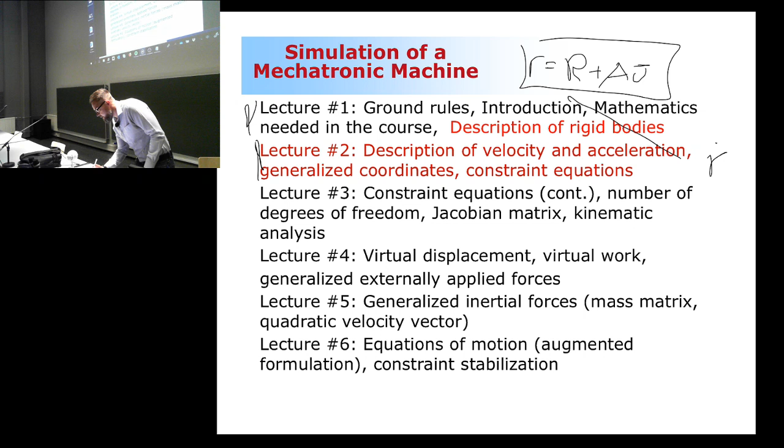And once we differentiate the velocity with respect to time, we will get what? Acceleration. So we will get acceleration. Why are we interested in acceleration?

Because that will be something we definitely need later when we look at dynamics. Remember, in dynamics we basically deal with this equation you're very much familiar with: externally applied force is equal to inertial forces. This is mass multiplied by what? Acceleration. So instead of using A here, we will use R dot dot. That's it. That's how we can describe particle dynamics.

But there's something important prior to that: we have to look at how we can limit the motion possibilities of a multi-body system. Remember, a multi-body system consists of multiple bodies connected together via joints. What's the role of joints? They limit the motion possibilities.

How can we express these limitations, these couplings between the bodies? We go back to this equation, and again we will use it over and over to describe the constraints, the joints. That's the story.

Now, just one more notation before we move ahead. I might ask in my in-class quizzes something like how is this and that, and one of the options is related to forces and moments.

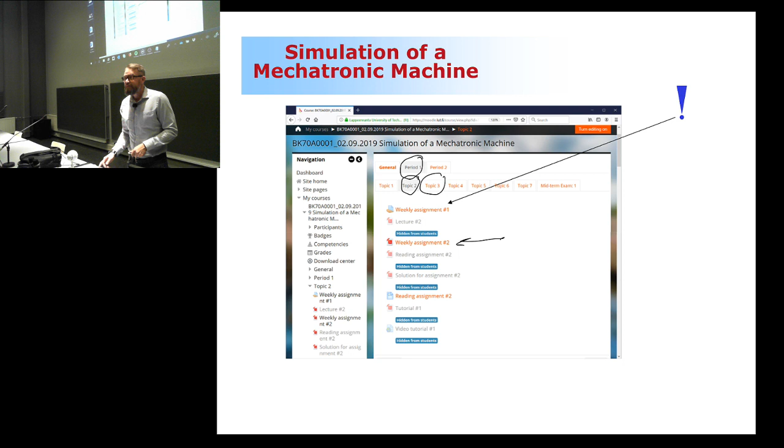Yes, we're all doing this. Just one more setting. YouTube officer, are we good with the voice? Is the voice all right?

It was really annoying to follow last week's lecture. You can easily develop a serious headache following that, not just because of the subject matter, but because of the breaking voice. I was checking all the equipment, and the only explanation for the breaking voice was a low battery in one of these devices. How is my voice today?

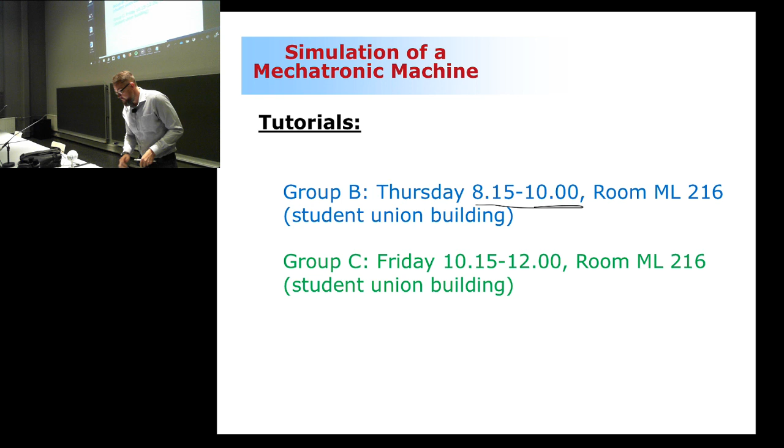What we discussed last week was multi-body dynamics. We concluded that multi-body dynamics is for a multi-body system, a system that consists of multiple bodies. It could be roughly one system like a pendulum, which is just a single body, but you can still analyze it using multi-body system dynamics. Or you could have a double pendulum, where there's one body and a second body.

What happened? The air server is off. Oh, please. Too many things, I need to connect this again. Okay, connect it again. So we are back on. Just need to remove this one. Can I use this one? No, where is it? Not connected.

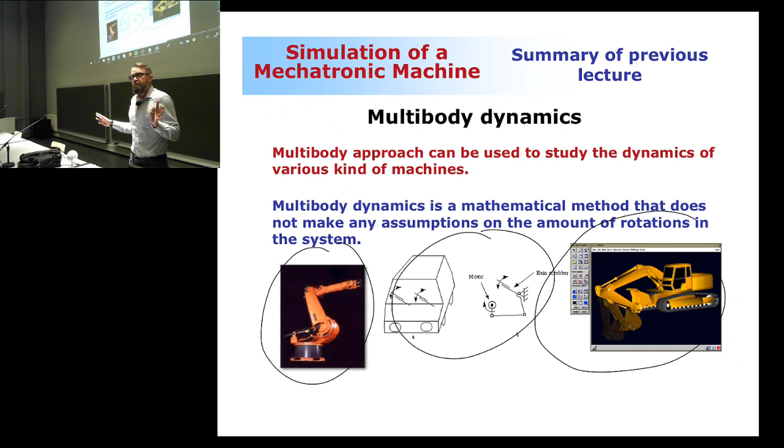We also learned that if a multi-body system consists of multiple bodies, one body consists of an infinite number of particles. It's very important to understand that a particle is very small—it's a mathematical notion, not something you can find in real life, but a very small dot. Because it's a very small dot, it does not have rotational degrees of freedom. Remember, a particle does not have rotational degrees of freedom.

In an in-class quiz that is coming soon, one option is related to particle rotation. Particle rotation makes no sense, so don't select that option. Whatever you do, please don't select that—it makes me feel happy if you don't.

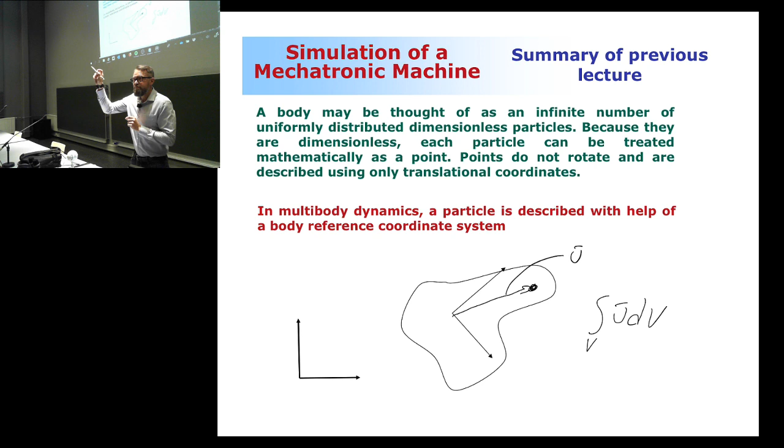So these particles—there's an infinite number of them—are described with respect to the body reference coordinate system. This concept takes a little while to understand: once we're describing one particle, the vector u bar is constant for it. But at the same time, vector u bar is scanning every single particle in the system. How is that possible? It's possible when I'm integrating the vector u bar over the boundaries, over the volume of the body, and this accounts for all the particles within the boundaries of the body. But for a single particle, that's a constant value.

So how does it scan? Well, it depends on where the body reference coordinate system is located. Say I have a box-like body. If the coordinate system is located in the lower corner, the vector u bar scans from 0 to W in the longitudinal direction, and from 0 to H in this direction—every single location within these boundaries. If the body reference coordinate system is located in the middle of the box-like body, then it scans from minus W divided by 2 to W divided by 2, and in the same way from minus H divided by 2 to H divided by 2.

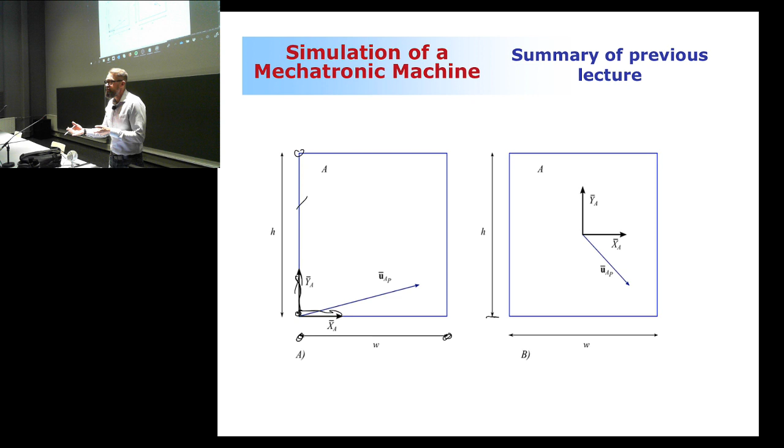Makes sense, clear. All right, this is the last thing about the summary, and then we're going to move on. As I mentioned, description of one single particle consists of two components. First is a translational component, accounting for the translation of the body reference coordinate system. Then I have the rotation matrix, which accounts for the orientation of the body reference coordinate system.

Now what is this matrix doing for us? It is mapping two coordinate systems together. What are those coordinate systems? The body reference coordinate system and the global coordinate system. That's what it's doing—it's mapping.

And it can be used for two purposes. It can map from the body reference coordinate system to global, or the other way around. How does that happen the other way around? Simply by taking the inverse of the rotation matrix. It's an orthogonal matrix—remember what an orthogonal matrix is? That's a special matrix where the inverse can simply be expressed as the transpose. The transpose is the mapping direction.

Now, if you look at the columns of the rotation matrix, these columns are actually defined in the body reference coordinate system axes—this is the x-axis and this is the y-axis. They are unit length, as a coordinate system is supposed to be, and they are perpendicular with respect to each other. So if you look at these two axes, they have a 90 degree angle between them.

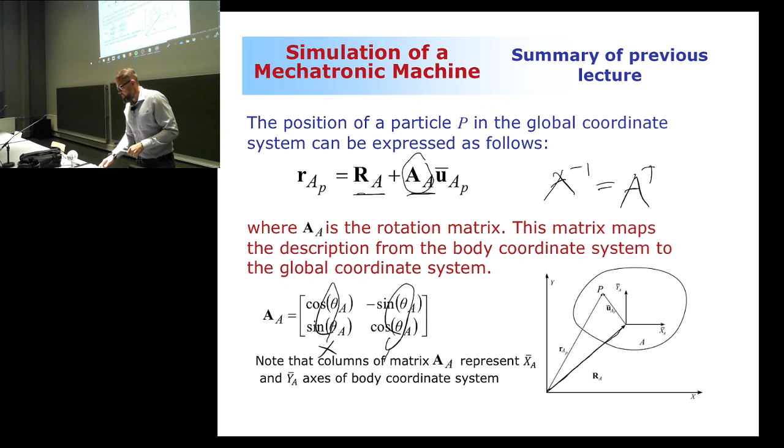Clear? All right, so let me ask you this: what's the role of the rotation matrix? This is our first in-class quiz, so please go ahead and log into Socrative. I can see that we already have 47 students logged in.

I'm thinking big today—I'm thinking the success rate is going to be more than 70%. Correct, more than 70. We'll see, maybe it's going to go all the way up to 90%. 100%, that would be really something, really really something. Then you're going to have a big group hug. Okay, now someone will make a mistake intentionally knowing there's this group hug. So, no group hug—let's put it this way. All right.

Think about it. If you're not sure, go ahead and consult your fellow student, because I would like you to score high. We'll go off here and I will revisit this part very soon.

Now what I'd like to do is spend 10 minutes on a topic that's a little bit aside from the mainstream of today's lecture and of this course—it's related to three-dimensional spatial description. This will be short, but I'd like you to be aware of it, and to know what happens in a real case, which is typically described in three-dimensional space. What's the difference between two-dimensional and three-dimensional space? Well, obviously we have one additional coordinate axis—a third coordinate axis—and that changes the game significantly.

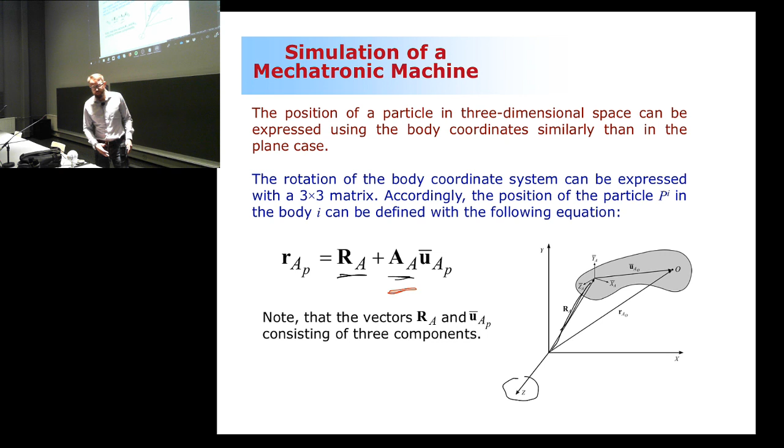Good. So how is it that we can describe these rotations in three-dimensional space? We're going to take a look at one method that is very famous, based on Euler angles.

Euler angles is a method based on three successive rotations. Successive rotations - successive, do you know what that means in English? This is the only time I'm doing translation for Finnish students. Successive means 'peräkkäiset' here.

What are the other nationalities we have here? Let's see, Russians - do we have Team Russia here? We do. Okay, so what's successive in Russian? I don't know. You need to look at the translation for successive rotation, because if you don't understand that word, you don't understand the concept. Team France, what's that in France? Successive rotations - same, I think. Is it more or less the same? Okay, so you know what it means.

So it's like once rotated will be rotated again, and two times rotated will be rotated a third time. That's what successive rotation means. All right, let's take a look at the concept. It's again based on successive rotations. How can we do the rotation? Well, there are of course many ways to do it.

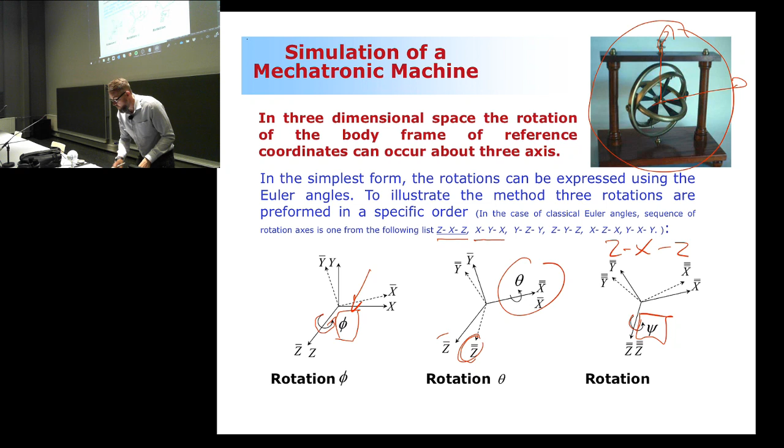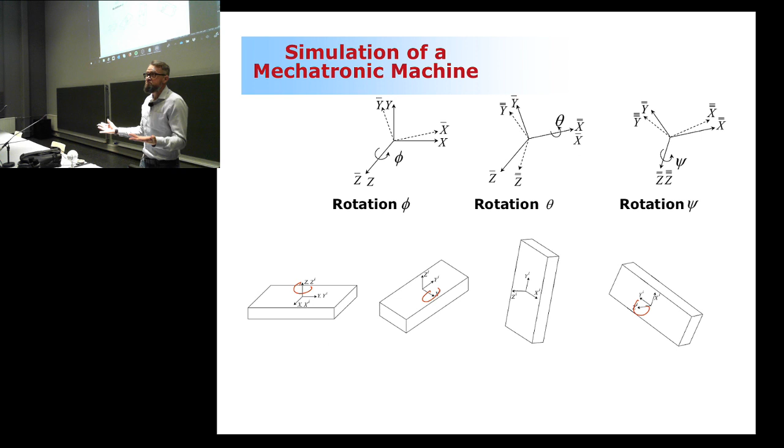All right, clear, so that's the story. So these are the three rotations. How it goes: first, rotation around the z-axis, like it rotates like this. Then around the x-axis, it goes like this, and then again around the z-axis. That's how it goes.

What that means mathematically is that we get back to this coordinate system, and each one of these rotations can be described by a 3 by 3 rotation matrix. Successive rotations mathematically can be accounted for by multiplying these matrices together. That's it. Let's look at the first rotation.

Remember, the first rotation takes place around the z-axis. In my 3 by 3 rotation matrix, the final column tells me where the rotation takes place - that's the z-axis. And if you look at this submatrix, that's exactly the same as what we dealt with in the two-dimensional case. So there's a lot of similarities.

Second rotation takes place around the x-axis - look at this, it's here. How the rest looks - again, it looks all the same. The difference, of course, is that we have theta here, and this one here is psi, and that notation is here. And then again, the final rotation is around the z-axis. So it's very simple, that's it.

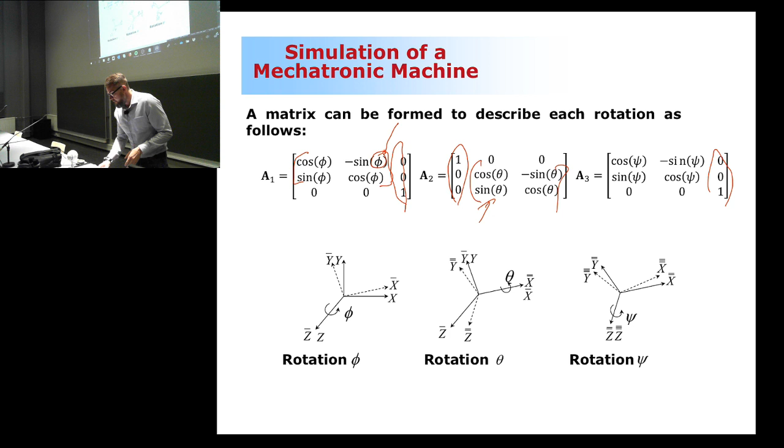So now we can just go ahead and multiply these together, and this is it - this is how the 3 by 3 rotation matrix looks. That's the rotation matrix for you to solve this week, one of this week's weekly assignments.

The problem related to this week's weekly assignment is that I'm asking you to introduce the rotation around the y-axis. But we don't have a y-axis. How is it that you can make it happen? You can make it happen by first introducing a rotation in order to move the x-axis to the original location of the y-axis.

So that's 90 degrees. Then you do your rotation, and then you compensate your first rotation. That was just because you wanted to have one axis in the direction of the original y-axis. So you take the final rotation as minus 90 degrees, pi divided by 2. That's it, so that's the solution.

You got it? You didn't, but that's all right because there's a recording, so you can go back and forth. And then you do the weekly homework and it will be fine. I will repeat this next Monday - let me think, because the deadline is not this Sunday, but the Sunday after that. Yes, so I will repeat it. All right, you good?

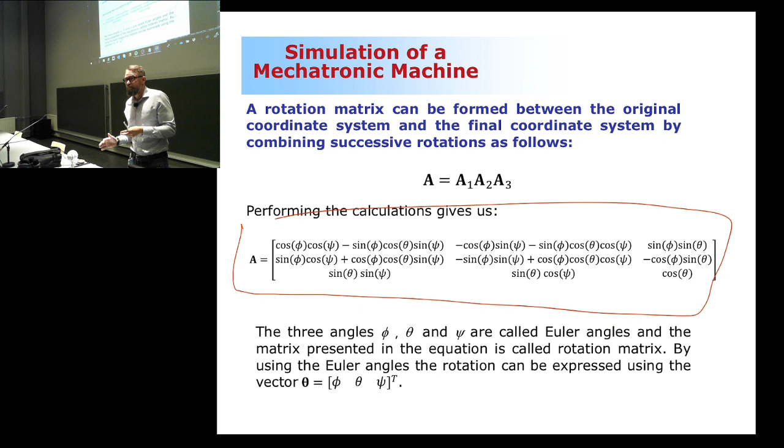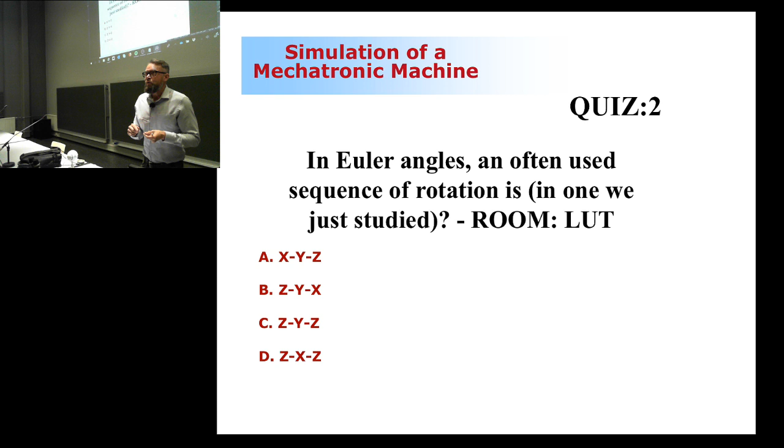Euler angles - the often-used sequence of rotation is the one we just studied. What was the sequence of rotation? So these are the options. Just a second, I need to go and look at how we're doing. Okay, what are the cases regarding the success rate?

So I'm saying 91, 91. What is it you say? 82, 82. I think, yeah, maybe you're right about that.

So what was the sequence of rotation we just looked at? All right.

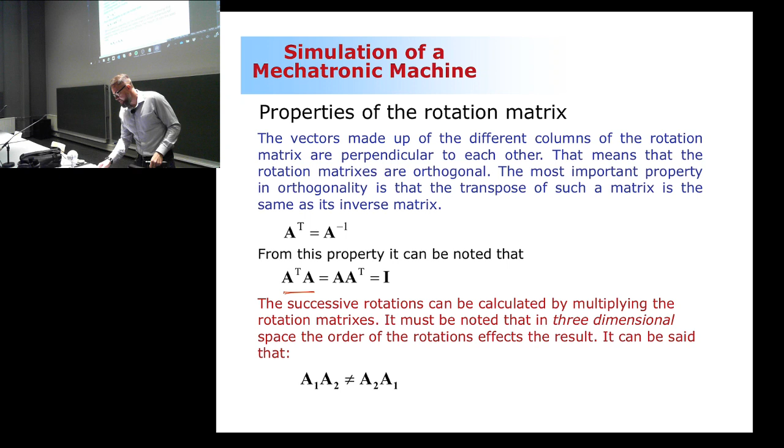And with that, I'm going to move on, and I'm going to look at the velocity and acceleration. What really follows is painful mathematics. That's what's going to follow. So before stepping into this painful mathematics, you need to take a deep breath, like, one more time.

Okay, now don't get confused about mathematics. Please don't, because we have a bigger dream in mind, not just doing this parcel, that, because that makes no sense. But we have this big dream. And the big dream is that we wanted to define the acceleration because, remember, F equals mass multiplied by acceleration. We need that to describe the equation of motion.

So that's the reason we're going into this painful mathematics. It is what it is, but sometimes you need to make sacrifices in your life. This is one of those times. Okay, so how it goes: we take the description of the particle, and we're going to differentiate that with respect to time. Simple like that. Okay, let's make it happen now.

All right, so here it is. I'm going to take a partial differentiation of this position of a particle with respect to time. You know how it goes, I can do this component by component. So I can first differentiate this translational component with respect to time. What is it that I'm going to get as a result? I'm going to get r dot.

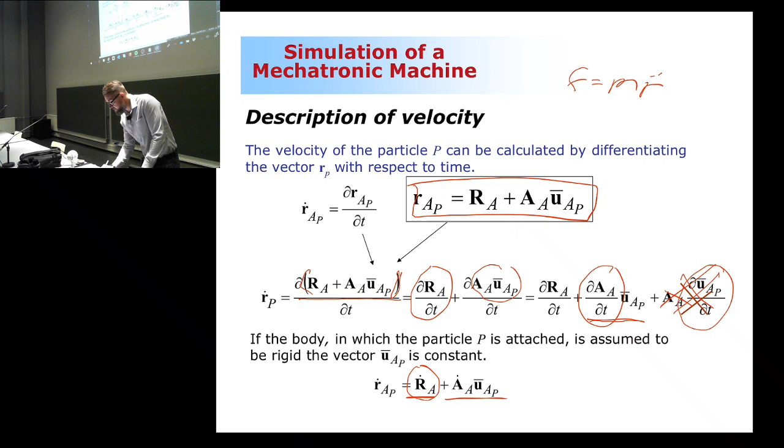That's constant, so it's not changing as a function of time because it's a constant. So I can say, okay, forget about this component in total. So what is left is two components: the translational velocity and the rotation matrix that is differentiated with respect to time. This is where we need to take a close look at what this A dot actually refers to. And this is where we need to take the toolbox from the mathematics into use.

So we have to apply this partial operation to each one of these components: cosine theta, minus sine theta, sine theta, and cosine theta. Each one of them has to be differentiated separately.

Following the chain rule of differentiation, this is just mathematics, nothing else. You can get this such that when you differentiate cosine with respect to time, you get minus sine theta, and then you have angle theta differentiated with respect to time. When you differentiate minus sine theta, you get minus cosine theta, and again partial differentiation of theta with respect to time.

All right, you still with me? You want to have a break? I know. You know where the door is located? It's over there, I can help you. I can walk with you, I can hold your hands and we can walk together outside of this lecture room. Oh, there's another door here too, so maybe we can use this one.

So don't get confused about mathematics, please, because this is just a tool. Soon we're gonna get something that is meaningful. We're gonna take a look at the interpretation. What is it we're gonna get?

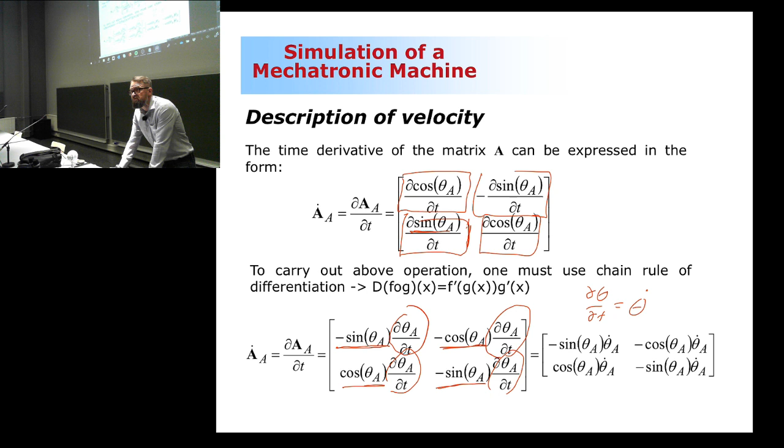All right, so I was here. Then you differentiate sine with respect to time, so you get cosine, and again you have this angle theta with respect to time. Here's a minus sine, and then angle theta. Let's denote partial theta, partial time as theta dot. All right, so let's do it. This is what we're gonna get, and now we're very close to the end.

Now, A dot, this rotation matrix dot, can be expressed such that I have here the differentiated rotation matrix. This has a relation to the original rotation matrix: it is just rotated 90 degrees, nothing else. It's rotated 90 degrees, and then I have here angular velocity. Rotated 90 degrees multiplied by angular velocity.

End of the story. All right, so in summary, velocity can be expressed such that velocity of a particle consists of two components: translational velocity, and then rotation matrix rotated 90 degrees multiplied by angular velocity. To denote this, this is a rotation matrix, and the subindex here is theta. So that's what it means, and that's exactly how it looks.

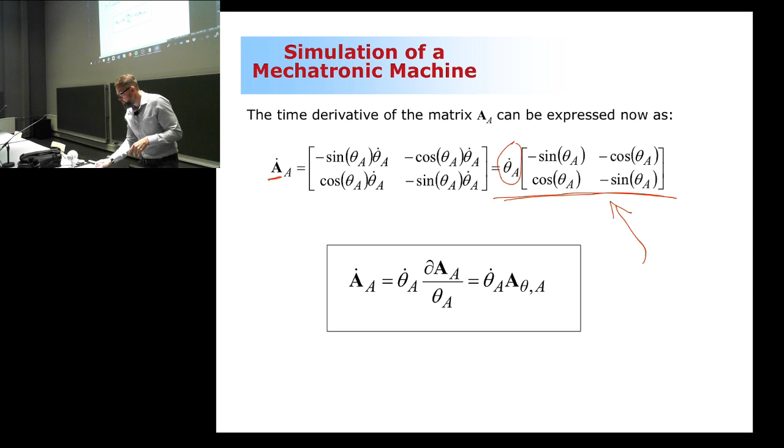And then I have here the U bar, which has to be there because I'm looking at the velocity of one single particle. Makes sense?

Are you still doing like, yes, I have this can-do attitude, I can make this happen, this will happen? You have it? Good. Can you take another load? This is going to be more painful, I can guarantee you that, because there is still one more step — this was just the middle step. And the dream is over there, really far off.

So that's acceleration. How is it that we can make this acceleration happen? Well, nothing, there's no other way than just use brute force. And brute force means that we're going to take this velocity and use mathematics again to get acceleration. Okay, let's make it happen.

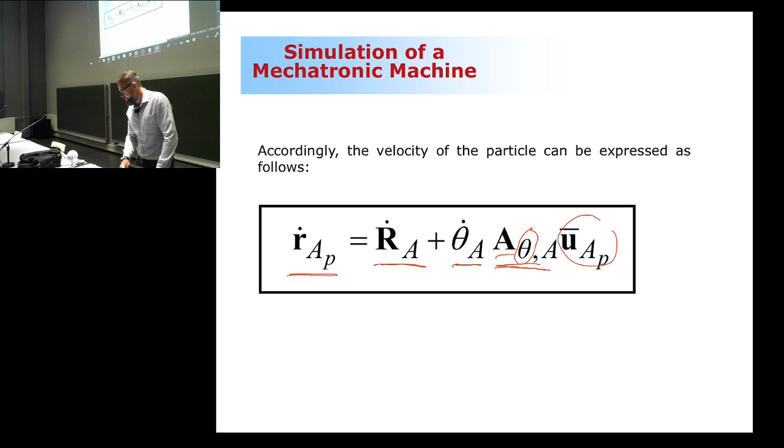Now I'm going to cut corners here. I'm having this expression of velocity, and I'm not going to use that detailed explanation like in the previous case, but simply take it component by component. The first component I'm looking at is velocity, so what happens to it? We are looking at translational velocity — what happens if we differentiate that one more time with respect to time? We get translational acceleration. Correct, translational acceleration of what? The body reference coordinate system. So we're measuring the translational acceleration of the body reference coordinate system.

Okay, so then we have here a really painful thing — this part of the equation. Nothing else really helps, just go ahead and do it. We know that if you differentiate the vector u bar, that will be equal to zero, so we don't need to worry about that. But there are still two components we have to worry about. The first is when we differentiate this rotation matrix, so we get this notation: angular velocity, then the once-differentiated rotation matrix with the dot, and vector u bar.

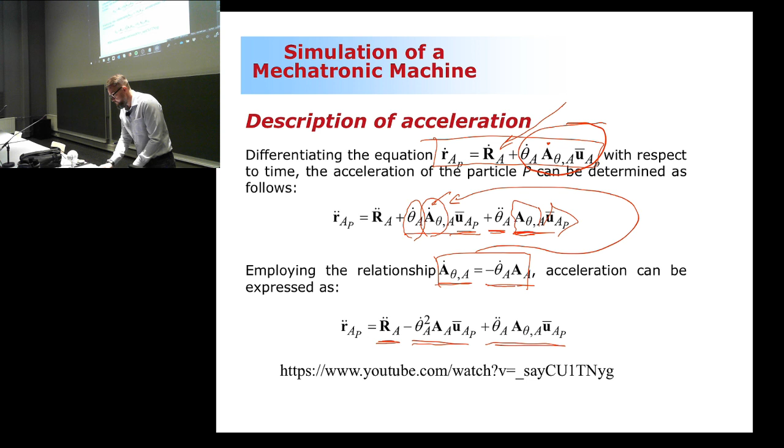There is a name for this. I can call these components by different names. The first one is clear - that's the translational acceleration component. The second one is the normal acceleration component. And the final one is the tangential acceleration component.

The very important question is: what about Coriolis acceleration? Because in my previous courses in dynamics, we looked at Coriolis acceleration seriously - in many cases it was very important. It may be, but think about the definition of Coriolis acceleration. By the way, what is the definition of Coriolis acceleration? I can tell you if you don't want to answer that question.

It means that Coriolis acceleration takes place if a particle moves in a rotating disk. Here's an example - they're like, what? Is this a joke? Partly, it is partly a joke, but I'm a particle that is moving in a rotating disk - the rotating disk being Earth. I'm moving here, so I'm experiencing the Coriolis acceleration.

It's very, very tiny. I heard that some students say that on Friday evenings when you have several drinks, you can feel it - you can even lose your balance because of that. I don't know, maybe that's the case, I'm not sure about that. But it's a very, very tiny acceleration that you experience walking on this rotating disk.